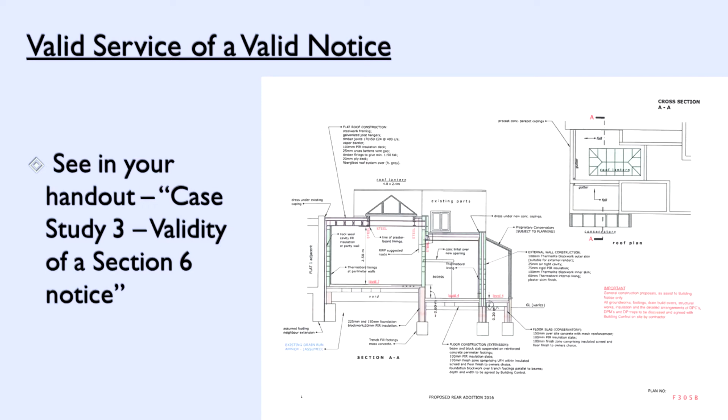This was the property we were talking about, in Wimbledon. Usual configuration - an old Victorian house subdivided into 4 flats, 2 on the ground floor, 2 on the first floor. The ground floor flat on this side, roughly the dividing line, has already been extended - they've built a series of rear extensions, one of them seemingly on or near the boundary. My appointing owner owned this flat, and he just wanted to build a rear extension in this area. Absolutely bog standard, no real problem with this.

So I served those notices, and I wasn't really prepared for the storm that was coming my way. Rather than the usual reply or acknowledgement back from the adjoining owner 10 days later, I got a solicitor's letter running to pages. I went to see my appointing owner and said, 'What's going on?' And he said, 'I perhaps didn't give you the full picture.'

It turns out this guy and the neighbour had been at war for about 10 years. I was just thinking, okay, cheers mate, you've landed me in it this time. But I said, that's okay, we'll use the Party Wall Act to navigate our way through this, because I'm a great believer in it - it's a genius piece of legislation. It's there, as we said at the start, to allow you to do your works.

As long as you don't inconvenience or disturb the adjoining owner, we will motor through. So actually two notices were served at the time, because the adjoining owner thought this is a party wall and had been built astride the boundary, which meant he could make use of it under section 11, subject to paying compensation of 50% of the current cost to the adjoining owner.

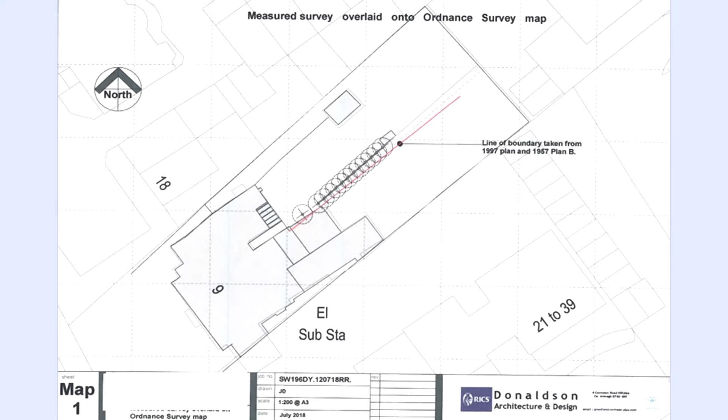But then he came back to me - oh sorry, that was all looking good - and then I read the last paragraph, and he said, however, your Section 6 notice is not valid. So everything is okay, and you can build your wall on the line of junction when you find it, but you can't excavate for foundations until you serve a new notice. So my question is, why was it invalid?

It was a longitudinal section, not a cross section. Show the location of it, that was all okay. There was no depth on there, was there? Yeah, so there's no depth in the foundations. Didn't say how deep they were - you know, the little note that always says minimum below ground level subject to building control inspection. Wasn't there. I'd never looked at it.

And that in itself, I wrote back to him and said, that's fine, you don't have to state it, there's a scale on the drawing. The drawing's a scale - I mean, where's the scale? There was no scale. So I'm sorry to the architects in this room, but hey.

There was a guy who knew what he was doing. He was taking no liability for anything. So unfortunately there was no scale and there was no annotated depth. One or the other would have been fine. So the Section 6 notice was invalid.

So in the end, this guy brought it all the way back and built it three metres away, so he didn't have to invoke the Act at all and could just get on with his building.

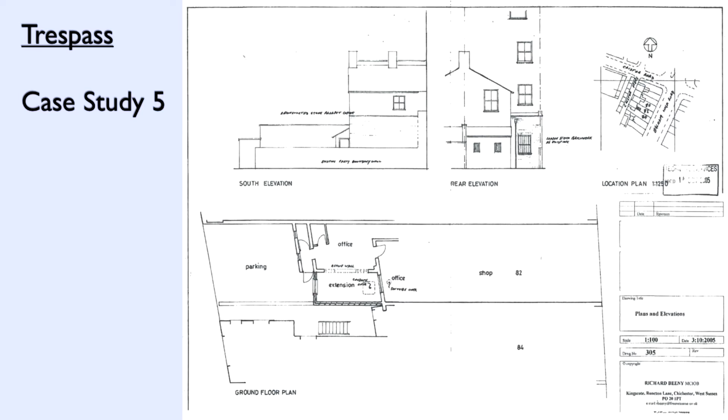This was the alleyway between the properties, and my client wanted to build a little infill extension here. So that was all pretty straightforward. My first question was, well, what type of wall is that? Because that's going to determine what I do next.

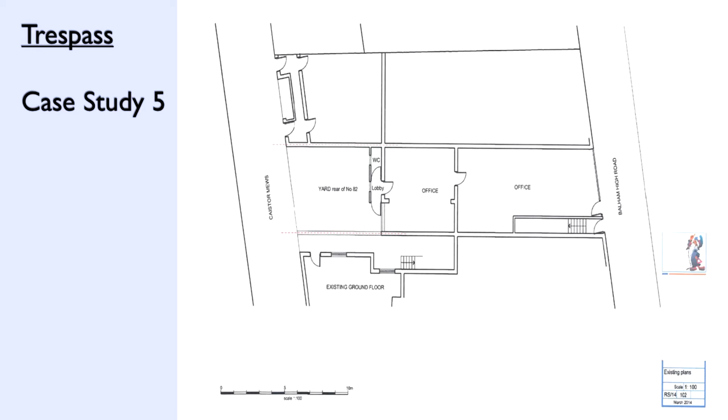I managed to dig out the old planning drawings, which clearly showed this wall was built astride the boundary. Not that that's definitive, but at the end of the day, those are this guy's drawings - why would he get them wrong? A bit more investigation showed that this had actually been a party fence wall built astride the boundary. No argument over that, it was written up in various documents. He knocked it down and used it as the external wall, rebuilt it again, but enclosed off it to build his extension. So that was all straightforward enough.

This is a little picture - that's the alleyway between the two houses, and this is the mews building that he subsequently bought. This is the little area where my client wanted to build their extension. Again, I thought this is really easy - we'll just serve notice, we'll enclose off their wall, we'll pay them compensation, he'll be happy getting a few grand, and it'll all be pretty straightforward. We're going to keep the alleyway here, just filling this little area at one story. Couldn't be simpler.

Unfortunately, that was the furthest from the truth. I arrived on site and I'm just aghast looking up this alleyway and seeing all the property infringements there - a door coming onto the alleyway, a window overlooking my appointing owner's alleyway, and various drains, gutters, flues, all sticking out. I'm going, okay, well the one thing that's for certain is we can't enclose on a wall that's got a door and a window in it. So we're going to have to think a bit more laterally here and see what we've actually got.

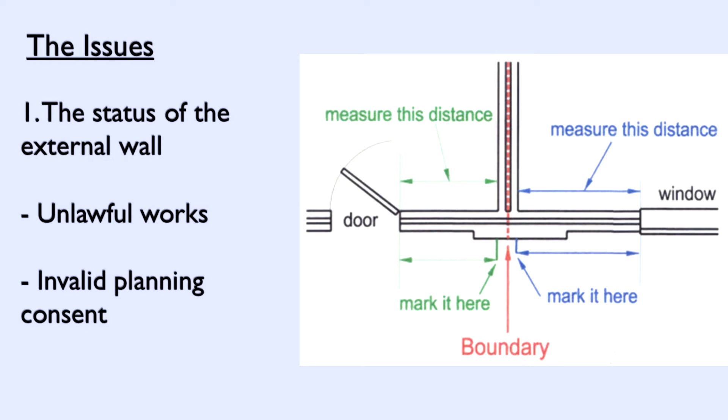So if you need to measure, looking back at section 38, which says the midpoint of the wall is the boundary, you're trying to determine where that boundary is - just take measurements on the inside from two openings, from the door reveal to the wall, from the window to the wall, come back outside to the rear wall, mark those either side, and bang in the middle is where your boundary is. You all know how to do that, it's pretty basic stuff, great for terraced houses.

Then of course we're having a look at these issues. Once I determined - and then I saw we had documents that said it was a party fence wall, etc. - I thought, right, fine, definitely he's rebuilt what was a party wall, so it's still a party wall, and we have the right to use it. So I started categorising all the issues here. One is where the boundary is - I'm quite happy, I know where the boundary is, it's a party wall. But what are we going to do about this window? What are we going to do about the door?

With the window, he said, no, I have right to light, you can't block that window. I use that window, it's the only light that comes into this rear extension, you can't move that. The door, he said, oh, but I have a right of way over the alleyway out to the mews at the back - you can't block that, that's my right of way.

Having a little look at these - and again, the law to a lot of this is in the handouts, I'm not going to go through it now in great detail - the first thing I thought was, right, what rights could he have? I have it in, I'll go through a few others and then go back and tell you how I dealt with them.

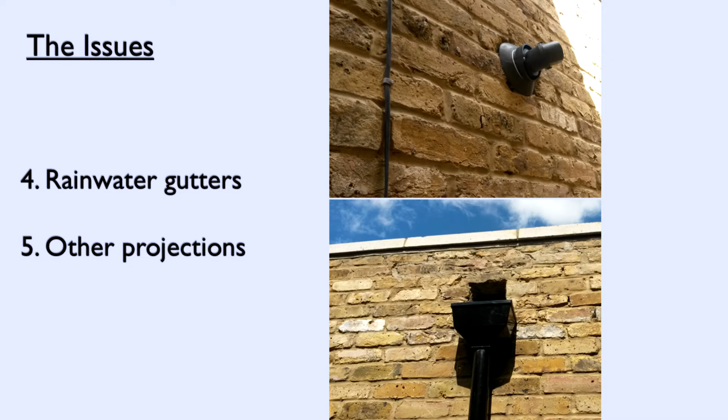A couple of other things we've mentioned - there was a flue sticking out of the wall, there were gutters, rainwater flowing down, again all projecting, because we've already decided that this face is the outside, is the boundary. So anything that projects over that is a trespass - pure and simple, shouldn't be there unless there's a right.

So as far as easements are concerned, that's your right to have something like a projection, the right to light, right of way, or right to running water. These are the issues that we looked at. Most commonly, there are other ways these can be made, but under the Prescription Act 1832, if something has been used for 20 years, it may form the basis of an easement. An easement is a right of one person over the property of another.

It could also be more commonly made by deed, so it could be an express right where you have a contract that says there's a right of way running from A to B. Dead simple, it's in writing, signed by both parties, that's immediate, that's there. Failing that, under the Prescription Act, you may have gained that right as if you'd always had it, by having 20 years use.

Thankfully, the extension was only built 10 years ago, so it'll immediately say there's no right to light then, they haven't got the 20 years. There's no right of way - we looked at all the deeds, his and ours, there's no mention of it whatsoever. There's no right of running water either.

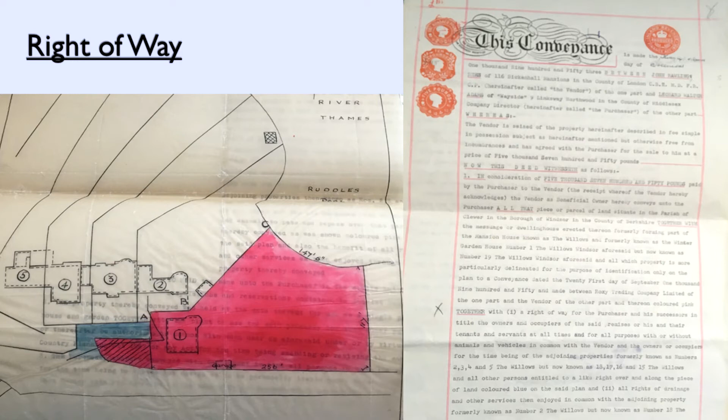My client was parking his cars along here, and my adjoining owner came to me and said he's parking his cars and I think it's on my land, can you get him to move it? In the end we did, not because he was on his land, but because he was parking on a right of way enjoyed by about 5 different houses. This whole area, blue and red hatched, was all one big right of way, so no one can block it by parking.

Much to the angst of my client, because he parked his cars here, I unfortunately banned everybody from parking anywhere. I'm never allowed in Windsor again after that one. It was one of those consequences of giving great advice and thinking you're a genius, and everyone then telling you to bugger off afterwards. I think they've just ignored me and parked the cars there again. But I got asked the wrong question.

So in that previous one, establishing the external wall was a party wall was key to everything else that followed. I must say I was very surprised it was never challenged. The adjoining owner accepted, yes, there was a party fence wall, and yes, I knocked it down and rebuilt it. That was his mistake, but that allowed me an out to solve a lot of these problems.

Because there's one thing identifying, you have no right to have this, but what are you going to do to remedy it, so your works can actually proceed? In this instance, I realised he had no rights, therefore they shouldn't be there. But the lawyer said they gave a 30% chance of, at court, getting him to close the door and the windows, at a cost of about 35 grand - this is one of the big law firms. And I'm a little bit, really?

So I just served a Section 2 notice, says we're going to enclose off your wall. The building owner has the right to underpin, thicken or raise a party structure, a party fence wall or an external wall which belongs to the building owner and is built against the party structure or the party fence wall. So basically, the thicken allowed me to brick in the window and the door.

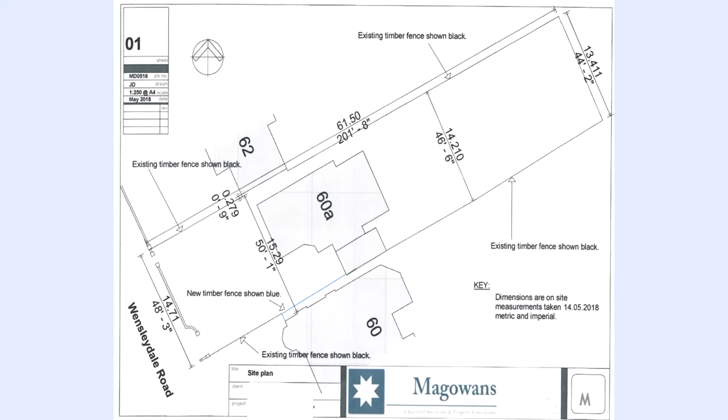So I went over to that other house on the other side, and if you remember, this line seemed to go top to bottom up against the wall here. But the interesting thing is, this house hadn't been built. Okay? So whoever drew that on was going, this is obviously where this house is going to be built, but it wasn't built. So that was key.

How did you find that out? It just went through land registry. Hadn't been sold, it was open space. It belonged to the property next door.

It was the same idea. So just the house that was there just hadn't been built. Whenever our house was built, it just wasn't there. It was land registry. You can see when it was sold off, the house on the other side. It was a vacant plot. It was their garden. Never been built on.

And so I went over and had a look, and then I realised I found my missing foot. Because the boundary fence ran up to the front of the property and then came in a foot up against the gable, because what's the point in having that sort of space off the edge of a house? You can do nothing with it. They just hadn't bothered putting a fence there. The fence came to the front and the back of the house. And even this little wall, there's a gap there you can barely see, but it was a foot, so it kept everything off. So the guy had built everything up to his boundary and stopped. Then this house was built, and they didn't go all the way to the boundary, they just stayed shy of it. So we found our missing foot, if you like, trying to make logic behind the theory and what you find on the ground.

And that was only the start of the problems, because once we worked it all out and did a proper topographical survey - I'm not a land surveyor, so if I'm doing boundary disputes I always engage a land surveyor to do me an accurate plan that I can interpret and work off and layer things onto. What we worked out was, at the front of the house, this guy had stolen that amount of land, but actually over the years this guy had stolen that amount of land. So this gets back to your point of sometimes you do too much work and you actually find out it's not what you want to see.

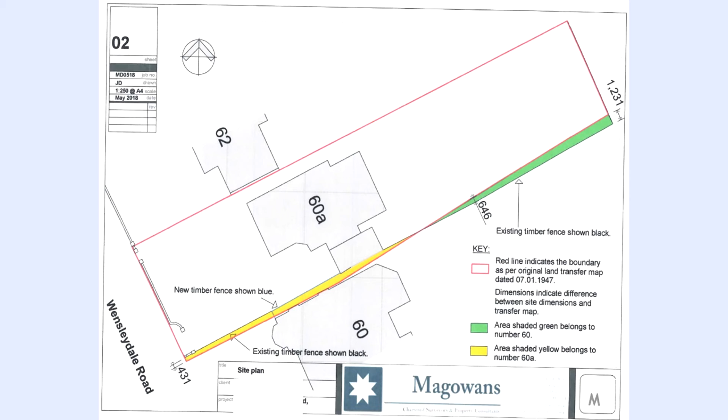So this was very simple. We all had a mediation in the conservatory - we sat in the conservatory of this house, neighbours sat in the conservatory of that house. And the great thing is the mediator was there, a retired judge, really good guy, got to the bottom of this, looked at the surveys, was very happy with all the evidence put in front of him, agreed with me about the missing foot, thank goodness.

Nothing really turned on it. Bottom line is they wanted this bit of land, and both owners wanted to rectify this, so in the end what we agreed was we sold them that bit of land. It turns out my client in this one - it was appropriate, it was his dad's house and he was going to sell it. He didn't really care what the boundary was, he just wanted it settled, just wanted the dispute over so he could sell it nice and clean. It made no difference to the value of it. So he ended up selling this - I think I valued it at about 25 grand, giving access to the rear garden for this house. That's probably worth about 2 mil, so you're talking big money here.

And at the same time, we took all the fences down and agreed a new boundary, myself and the other surveyor, and put on this guy, as part of the resolution, a brand new fence all the way down the boundary. Everybody was happy. The mediators drew up a legal agreement putting down the wants of both owners. That was put into what's known as a Tomlin order, which follows mediation - a legally binding agreement. That was fine, and then it was sent off to Land Registry. Land Registry aren't really interested in boundaries of this size, but it goes into the back of both houses' deeds, the title register, so if there's a dispute in future, it comes out. It's there for anyone to see. Both parties sign it, that's the end of it, because agreement between parties creates new boundaries, and that's all there is to it.